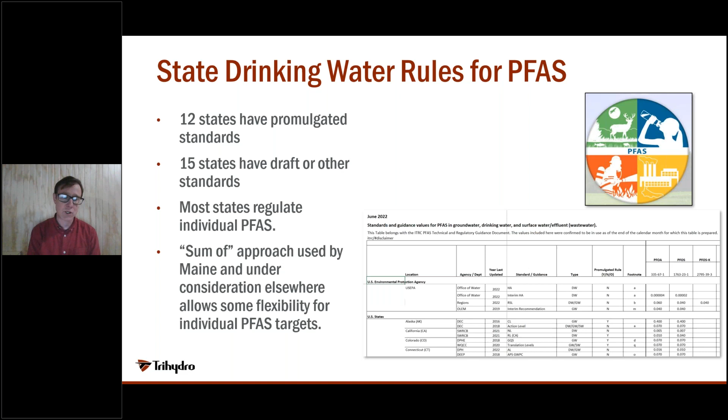Currently, drinking water in our country is regulated by the states. Many states have promulgated standards for PFAS, and many others have draft or other pending standards. Most of those states regulate individual PFAS compounds. The state of Maine takes a sum-of approach where you have to meet a certain total PFAS concentration target to have drinking water that meets the standard.

So if we're starting to think about treating PFAS and the greenhouse gas emissions associated with it, this is a good place to look because the actual final cleanup level hasn't been established, and we can start looking at different possible cleanup levels and emissions associated with those.

Some drinking water in our state before treatment is impacted by PFAS at concentrations that exceed the interim drinking water standard. That includes, in some cases, almost entire neighborhoods where private wells exceed the interim standard, and our Department of Environmental Protection is currently going to those homes. They've installed point of entry activated carbon treatment systems at those homes so that the PFAS can be swept out to meet that drinking water standard.

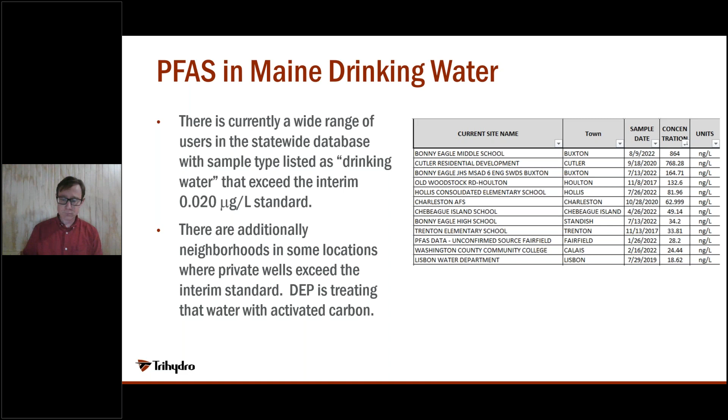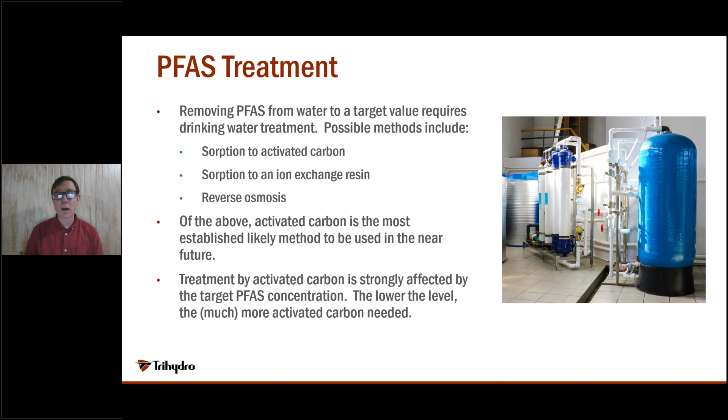That activated carbon technology is one of several ways that you can target PFAS and remove them from drinking water. It's also possible to use ion exchange or reverse osmosis, but of those technologies, activated carbon is the most established currently and is likely to be used the most in the near future. The treatment achieved by activated carbon is strongly affected by your target PFAS concentration. The lower that target level, the higher the activated carbon quantity that will be needed to achieve the treatment that you desire.

The reason for that is because activated carbon is a non-selective treatment media. PFAS sorb really well to activated carbon, and so do a lot of other things that are in water, such as dissolved organic carbon. So the lower your target level for PFAS, the more intense the competition for those adsorption sites gets, and then you need more and more activated carbon to get the treatment you want. Activated carbon can be sourced from coal. To do that, the coal has to be activated by steam to create a highly porous and adsorptive structure.

You can also get activated carbon sourced from biomass. A lot of people use coconut shells. That biomass first has to be carbonized in high heat and low oxygen, and then you take that carbonized material and activate it by steam.

All of those processes to make activated carbon are energy intensive, and we emit a lot of greenhouse gases to the atmosphere when we make activated carbon. For instance, to make 1 kilogram of activated carbon sourced from coal, we emit about 18 kilograms of CO2 equivalent to the atmosphere. The emissions associated with making biomass-based activated carbon are lower, but they're still really high.

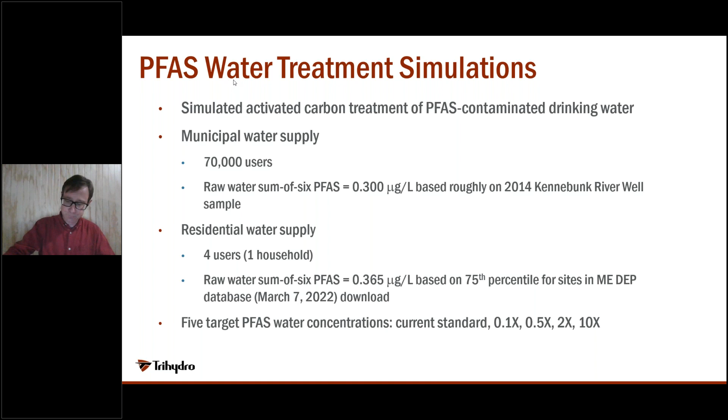To do those sorts of simulations, you have to calculate for a starting raw water concentration, how much activated carbon will you need to treat to a target water concentration. And we were fortunate that adsorption parameters were available in a nice study that provided that data both for coal sourced activated carbon and for biomass sourced activated carbon.

Once we calculated how much treatment media you need for each scenario, we then calculated emissions that included the following components: activated carbon production, building and shipping of the treatment vessels to the treatment site, shipping of the activated carbon from the vendor, and the most likely vendor for most of our treatment systems will be in Pennsylvania. Activated carbon disposal by thermal desorption. That's once you've finished with your treatment media.

And then once you desorb the PFAS from your activated carbon, we did not include destruction of the PFAS. That's a really big topic, and there are a lot of different directions you could go with that. So to keep things simple, we did not include PFAS destruction.

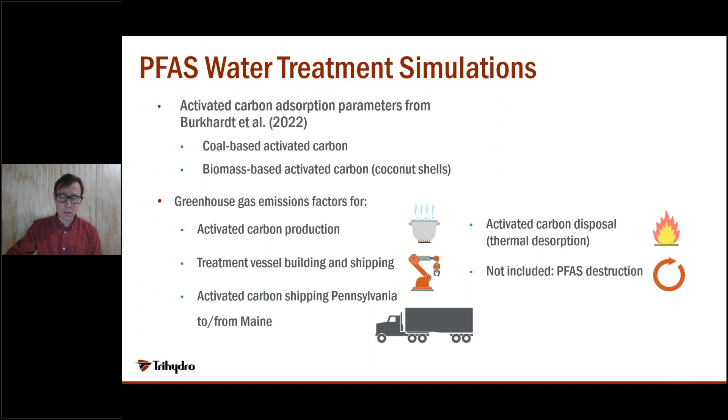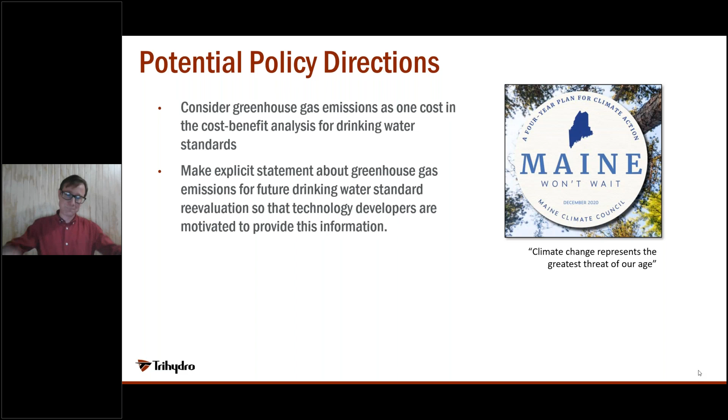All right, thank you, Ben. Let me try to share my screen. Can you see that okay? Is anything showing yet? Yes. Yes, awesome. Thank you for the confirmation there.

All right, so as Ben mentioned, I'm going to kind of expand the view of the conversation he just presented, but I first want to acknowledge the work he published. The publication he mentioned right there at the end is the inspiration for the evaluation that we did at Jacobs. So I'll kind of refer back to that as I talk through. But today, again, we're going to talk about what is the environmental footprint of PFAS treatment technologies for both liquids, and also some discussion of solids.

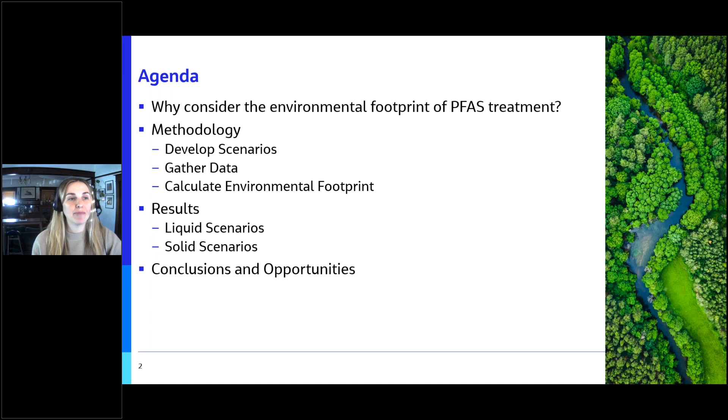A quick agenda for today. First, going to go over the why of the presentation. Why is it important to evaluate and consider the environmental footprint of these PFAS treatment technologies? Then we'll talk through the methodologies we used during our evaluation, including the development of scenarios, the gathering of data, and the calculation of the footprint. We will, of course, go over the results of the evaluation and then wrap things up with some conclusions and opportunities. So for this presentation, we will start with how will we remediate PFAS?

So due to the nature of PFAS and its differences from some of the more traditional contaminants, we really have to ask how will we truly remediate PFAS? PFAS have obviously been attracting more and more attention as emerging environmental contaminants, increasing the pressure on industry to be innovative in their treatment technologies. Currently, as we just learned, many of the more tried and true remedial technologies are not quite as effective with PFAS.

The few traditional methods that are effective do not completely remove PFAS from the environment, and in some cases, they cannot sufficiently meet those low concentrations we're considering for our screening levels, which brings up another point. What standard will we remediate to? We just saw the importance of that.

As we might already be very aware, the standards for cleanup are a moving target. However, the likely pretty low cleanup levels coming for PFAS will potentially require really long-term and extensive treatment operations. This will make the environmental footprint even more significant. So the goal of this evaluation, again, was to build off of Ben's great work to help us better understand the magnitude of the environmental impacts of a wider range of technologies being used for PFAS treatment, and to also consider some opportunities for future savings to reduce that impact.

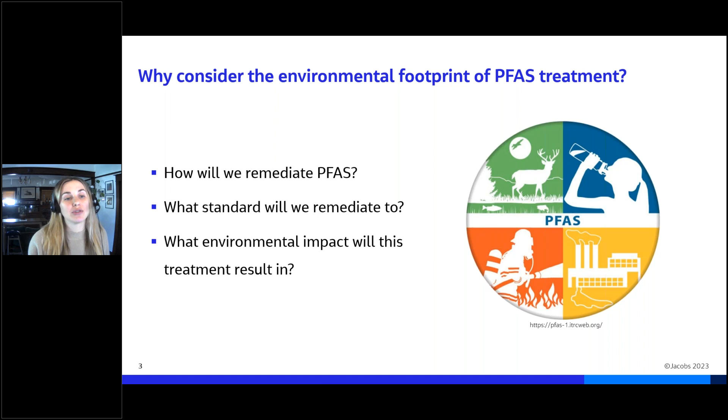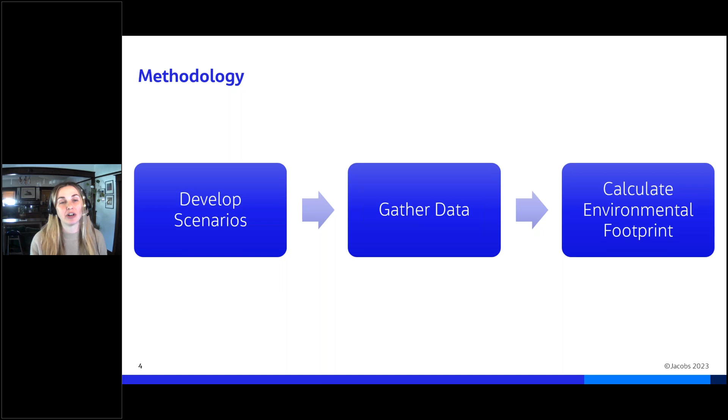So now on to our methodology. For this evaluation, we wanted to establish a standardized approach to more fairly evaluate the different technologies currently being utilized. So for this, we developed some hypothetical scenarios, nothing from an actual project, just hypothetical scenarios. We established general assumptions, we gathered the data, and then conducted the environmental footprint calculation. So let's step through each of these in a little bit more detail.

The scenarios we considered for this evaluation were designed to mimic a range of situations we may encounter in our environmental remediation projects. Again, not based on actual project information. Additionally, to simplify, we have focused in on just two of the key target compounds, so PFOA and PFOS. Let's talk a bit about each of these scenarios shown here.

So the first scenario, liquid scenario 1, this one considers 1,000 gallons of liquid with a starting concentration of 50,000 nanograms per liter combined PFOA and PFOS. This could represent things like the high concentration, low volume sources we encounter on projects, things like monitoring well IDW, some thermal treatment condensate, soil washing waste streams, etc.

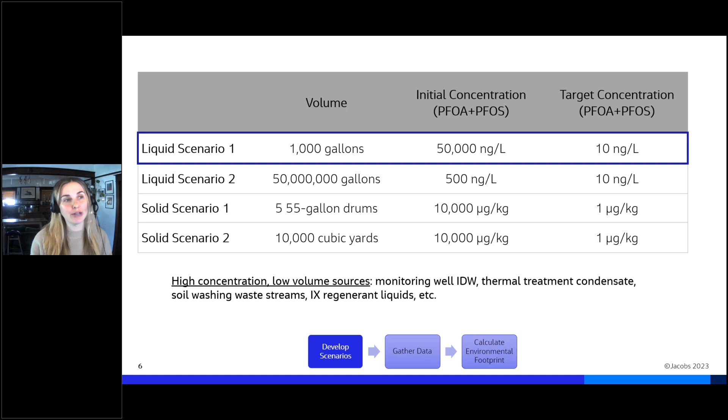The second scenario, liquid scenario 2, considers 50 million gallons of liquid with a starting concentration of only 500 nanograms per liter combined PFOA and PFOS. This could represent things like low concentration, high volume sources, potential pump and treat, groundwater, hydraulic containment systems, maybe contaminated site dewatering systems, etc.

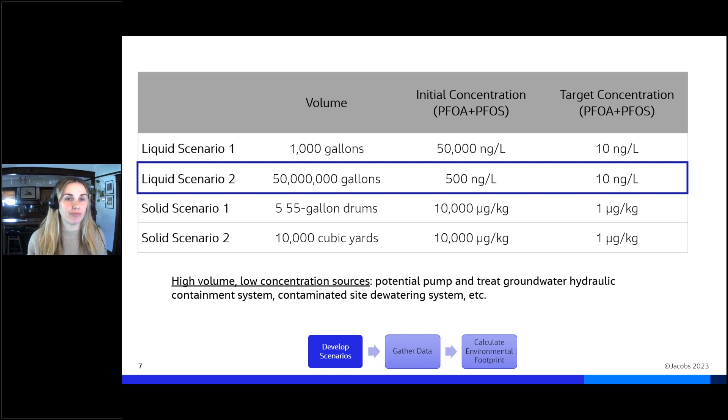The third scenario, solid scenario 1, switching media here, considers 5 55-gallon drums with a starting concentration of 10,000 micrograms per kilogram. This could represent the low volume scenarios we encounter on projects, again, potential IDW, maybe some drill cuttings from our environmental investigations.

And the fourth and final scenario, solid scenario 2, considers 10,000 cubic yards with a starting concentration of 10,000 micrograms per kilogram. This again could represent the high volume scenarios, things like potential source area contamination.

Once we had established these standardized scenarios, we defined some general assumptions to kind of level the playing field between each technology type. Some examples of the assumptions we provided are, we provided a standard set of GenChem parameters or soil parameters. We assumed all of our hypothetical site is located within the US, and the same hypothetical location was used for all scenarios, and that all vendors were an equal distance away from the site.

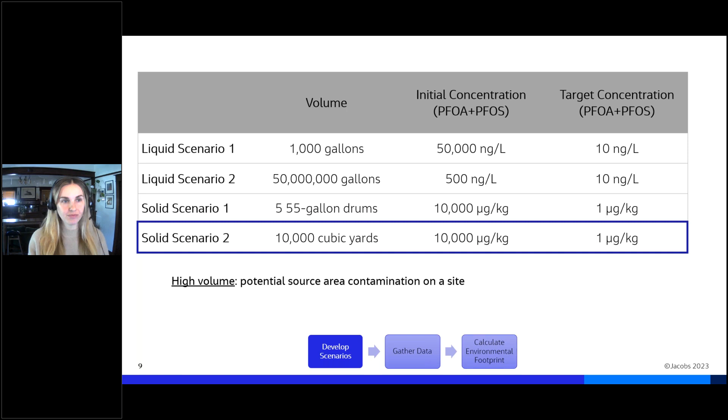With that brings us to the data gathering phase of our evaluation. So as we mentioned at the beginning of this presentation, there are developing technologies that are being considered for PFAS treatment. We wanted to work directly with the vendors developing and implementing those PFAS treatment methods, so we'd have the most up-to-date understanding of each of those technologies. So industry-leading PFAS treatment technology vendors were contacted and presented with these 4 hypothetical scenarios. We asked for each to provide general treatment operational information to derive the environmental footprint values.

We reached out to about 40 different treatment vendors. We received enough input from about 13 to 15 of them, with some helpful insights provided by a few other vendors. What we're presenting here on the slide are the treatment technologies actually included in the evaluation. So just note that this is not a comprehensive list of all of the PFAS treatment technologies that are currently available. Some additional technologies obviously exist. However, for our evaluation, we may have just not received adequate information from those vendors.

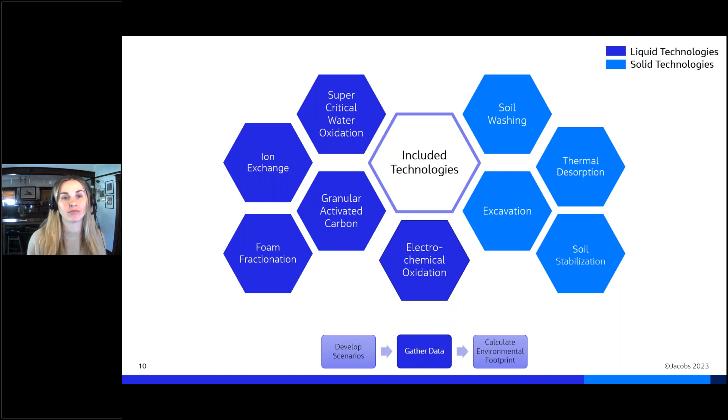Now on to the environmental footprint. So although an environmental footprint analysis may consider many other components, this evaluation considered only the factors that have the highest potential to contribute to our environmental footprint. This includes things like treatment material production and transportation, equipment use, electricity use, and material disposal. Each of the vendors, again, were contacted and provided a standard set of questions related to those scenarios, focusing in on the information related to these factors.

The components are obviously not universally applicable to all treatment technology types, but this was used as a baseline for initial evaluation. The vendor inputs were then summarized, converted to standardized comparable values, and then we entered them into SiteWise.

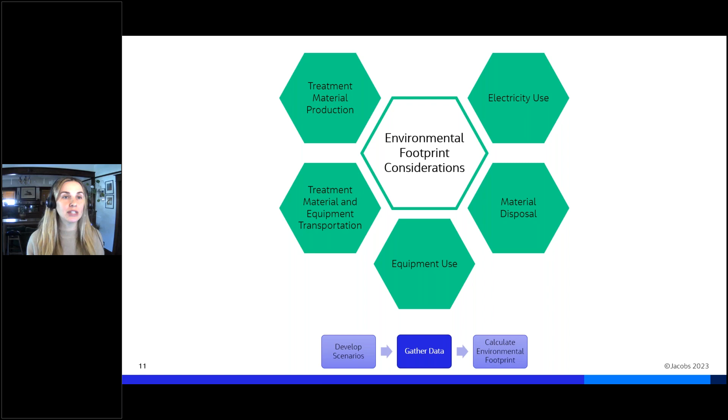If you don't know already, SiteWise is a tool that is designed to help calculate the environmental footprint of remedial alternatives. The tool you can download from the SURF website. It comprises a series of Excel sheets and provides detailed assessment of quantifiable sustainability metrics. So there's a standard set of inputs you are able to utilize within SiteWise. A few examples shown here.

Many of the items we use as inputs in this tool are items that you might compile already for a cost estimate, things like materials or drilling methods and counts, residual handling, things like that. So we standardized our inputs from all of those vendors to align with the categories within SiteWise. Once we entered all the inputs, the standard assumptions within SiteWise were utilized for the evaluation, and we were presented with the outputs from SiteWise.

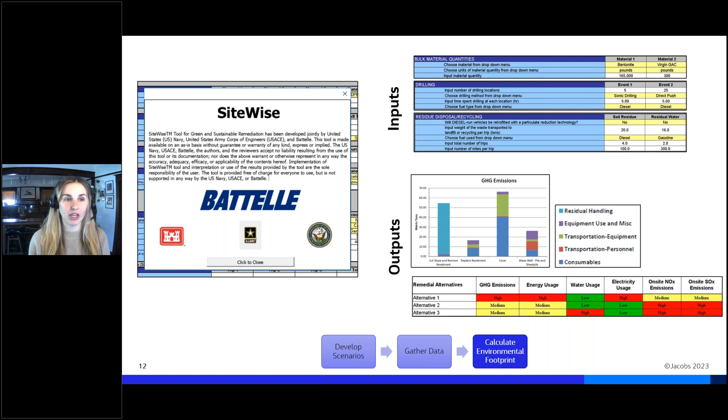Now, time to take a look at our results. Let's start with liquid scenario 1. So remember, this is the low volume, high concentration scenario. We received enough input from the vendors to evaluate 5 treatment technology types. We have supercritical water oxidation, ion exchange, electrochemical oxidation, foam fractionation, and granular activated carbon, along with regenerated GAC.

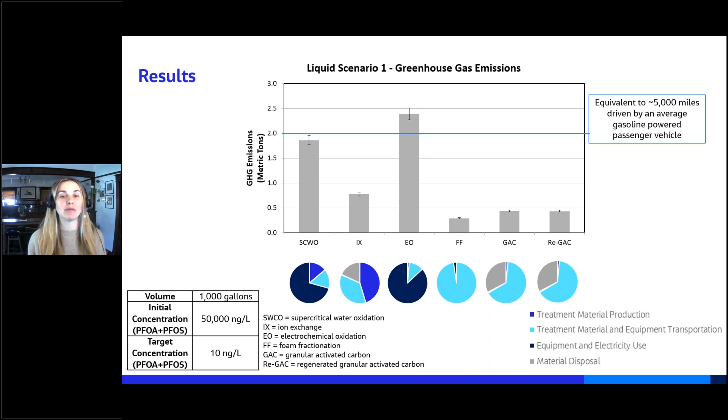Next, let's look at foam fractionation here. It's the smallest footprint of this technology. It's nearly all coming from just moving the equipment to the site. So overall, it's important to note the overarching differences in these technologies. Some are destructive and others are not. So this distinction in end product should be noted because the destructive technologies completely remove PFAS from the environment, whereas others produce a reduced amount of waste that must then be managed at a landfill. So an important long-term consideration.

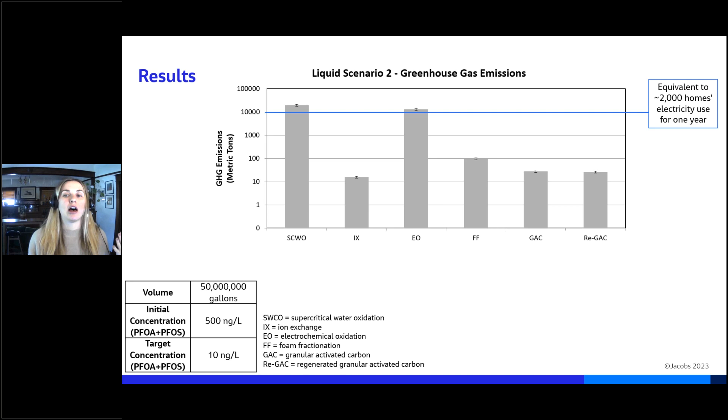Next, let's take a look at the results for the second liquid scenario, high volume, lower concentration. We received enough input to, again, evaluate 5 treatment technology types. Please note, though, that these results now are presented on a log scale, so indicating we have a much wider range of magnitudes than we did with the first smaller scenario. Additionally, we've added in a comparison of electricity used of a home over 1 year, so at 2,000 homes, electricity use, so a much larger magnitude.

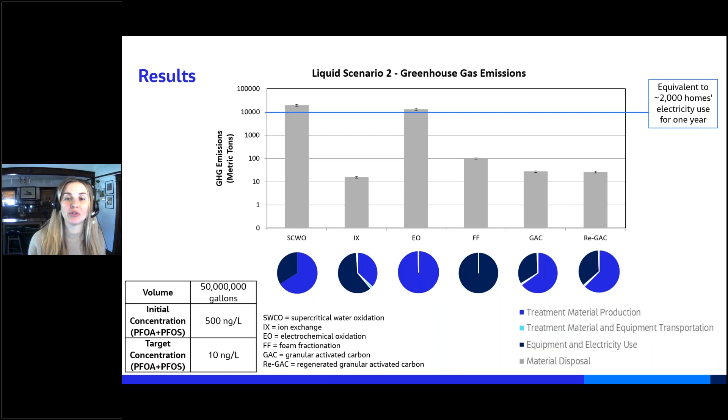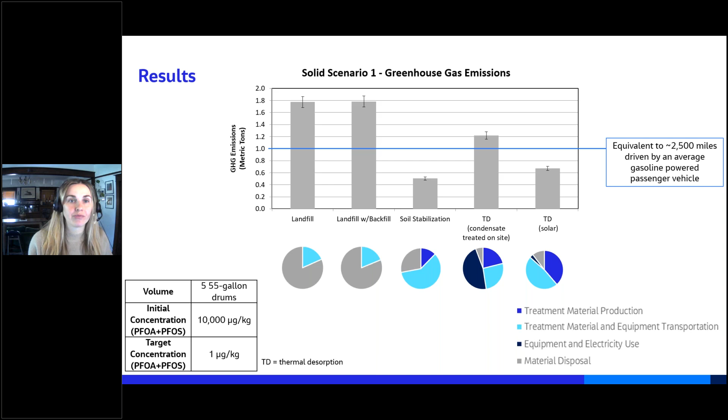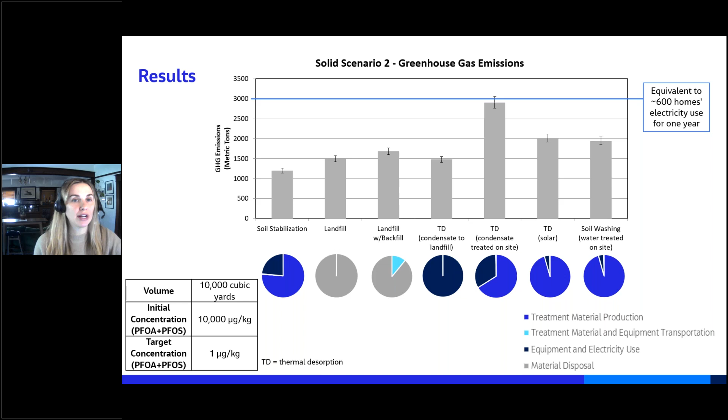So at this time in our evaluation, we have a few considerations and some potential opportunities for PFAS treatment technologies moving forward. First, the long-term resiliency of treatment technologies. So technologies resulting in disposal at landfills are, of course, accomplishing risk mitigation. However, they do not remove PFAS completely from the environment. So when we're utilizing one of those types of technologies, we may consider the addition of a destructive technology to minimize waste disposal requirements, which may be costly and have a higher impact on your footprint, but would prevent potential re-entry of PFAS into the environment.

Next, the main contributors in a lot of these larger scale scenarios were electricity usage and transportation. So with these having a larger impact, there is an opportunity to try and design out some of those contributions. Things like considering implementation of solar panels, maybe utilizing power companies that have higher percentages of renewables. A side note, this presentation was shared in Europe, where it was noted that some of the electricity-heavy technologies would have a much lower greenhouse gas emission associated, as some of their electricity profiles utilize more renewable sources. Additionally, this impact may be reduced in the future with the use of electric vehicles.

Next, in this evaluation, we did not request the combination of any treatment technologies. However, the concept of treatment trains may absolutely be considered in the future where applicable. The addition of a different technology at a pre or post-treatment step could create efficiencies overall and reduce the overall treatment footprint of some of the technologies.

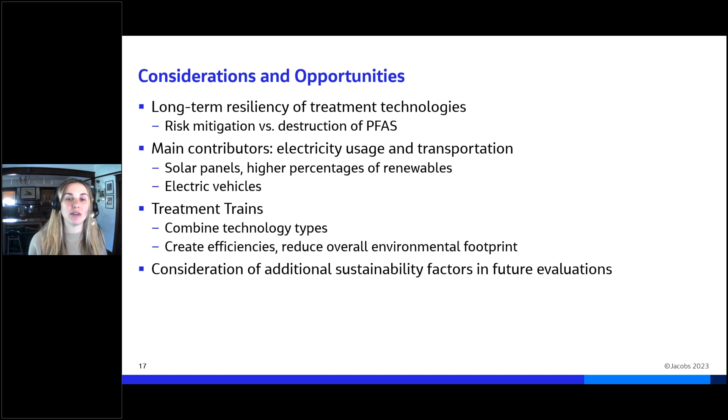Finally, this evaluation focused only on greenhouse gas emissions. There are many other important sustainability metrics that should be considered when looking at implementing one of these technologies at your site. Things like biodiversity or social impact, water use, resiliency of the treatment technology, etc. However, again, the goal of this presentation was just to wrap our heads around the potentially significant impact PFAS treatment will have on our environment. So again, with the low levels expected for remediation standards, the long-term operation timelines, it's important for us to really consider the potential impact we might be having on the environment and look for opportunities for future reductions.